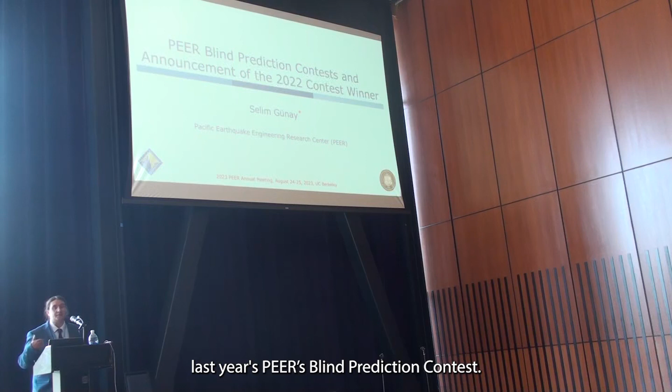My name is Selim. I'm a researcher at PEER, and I'm mainly here to announce the 2022, last year's PEER blind prediction contest. But before that, I wanted to show a few slides about what a blind prediction contest is, and mainly the PEER blind prediction contest.

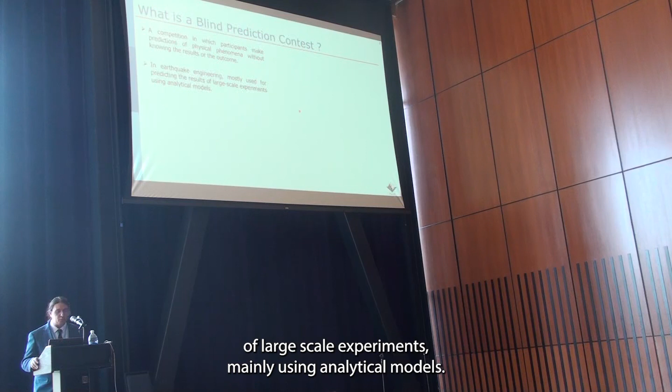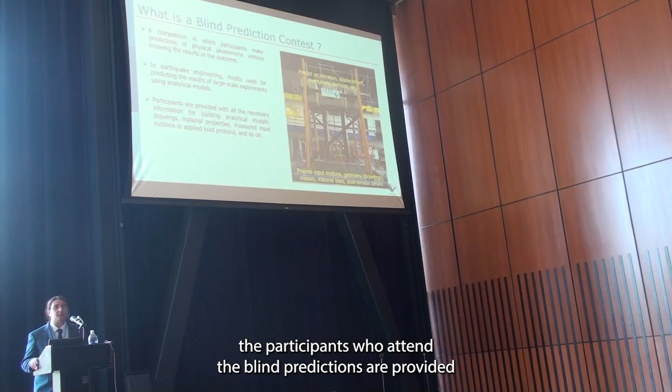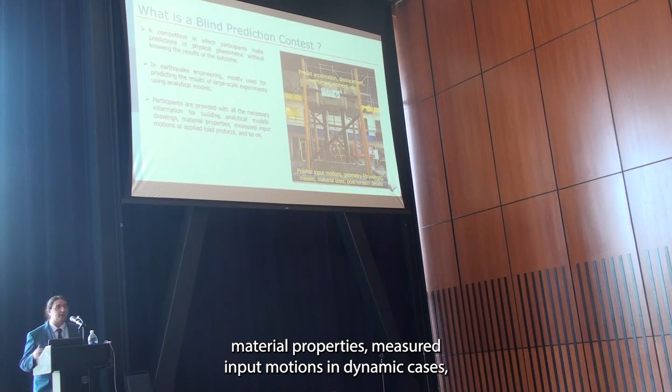To start with the definition: a blind prediction contest is a competition in which participants make predictions of physical phenomena without knowing the results. In earthquake engineering, it is mostly used for predicting the results of large-scale experiments, mainly using analytical models. Participants are provided with all the necessary information to build analytical models, such as geometry, drawings, material properties, measured input motions in dynamic cases, or applied load protocol for quasi-static tests, and so on.

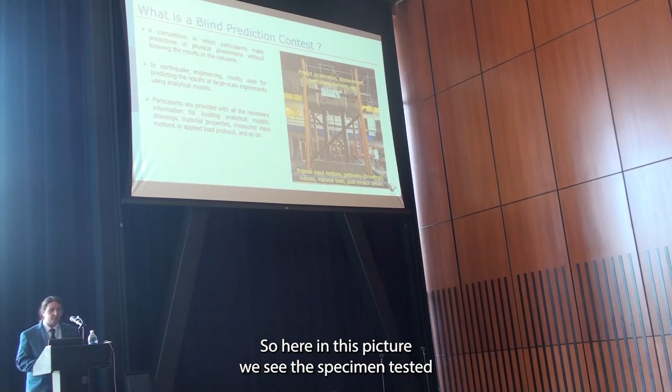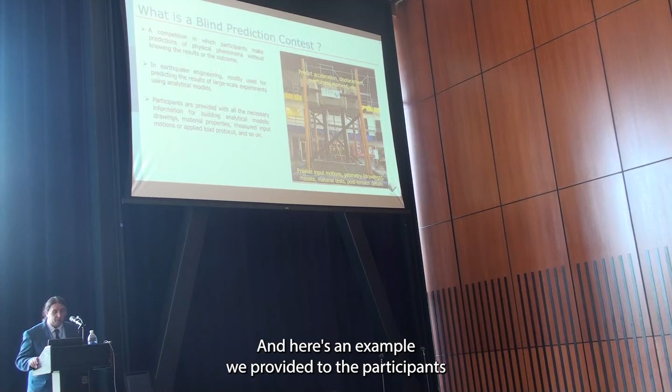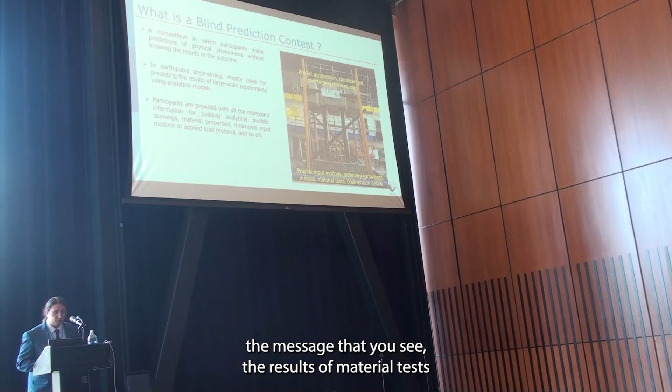Here in this picture we see the specimen tested and used for the 2017 blind prediction, which is basically a self-centering bridge bent. As an example, we provided the participants with the input motions, the geometry, the masses, the results of material tests, and the post-tension details, mainly for the self-centering system.

We basically asked them to predict some of the engineering demand parameters, including acceleration of the mass block, or the inertia force, displacement at the top of the column, overturning moment, and other quantities.

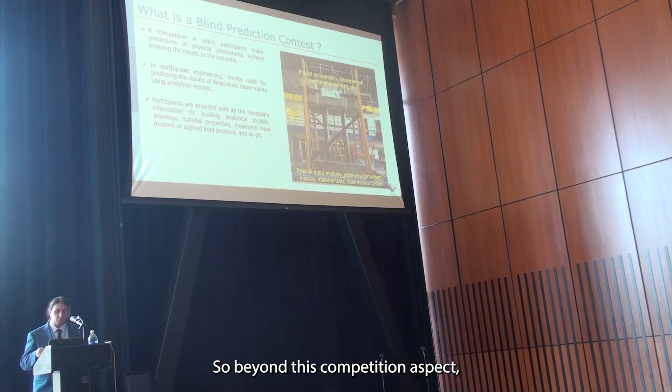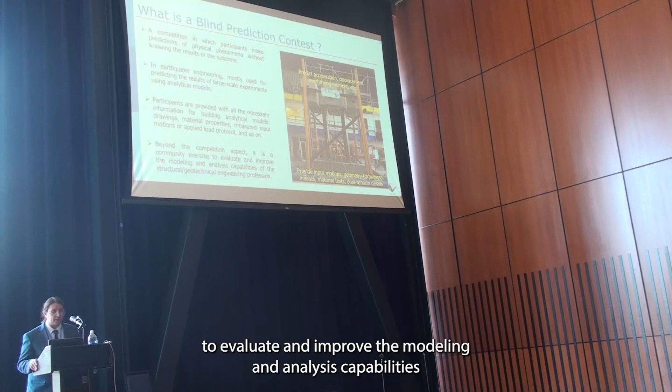Beyond this competition aspect, we can consider a blind prediction mainly a community exercise to evaluate and improve the modeling and analysis capabilities of the earthquake engineering profession, both structural and geotechnical. So it has that overarching aspect to it.

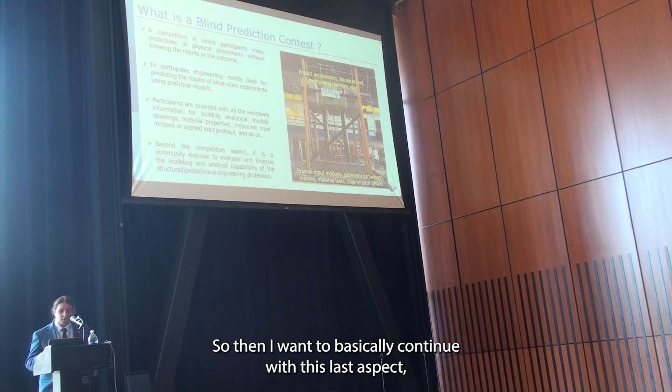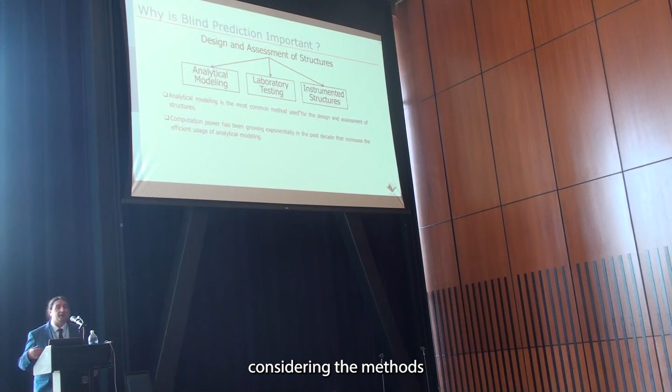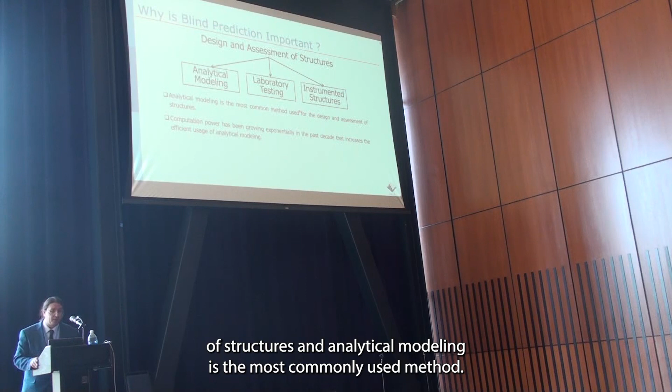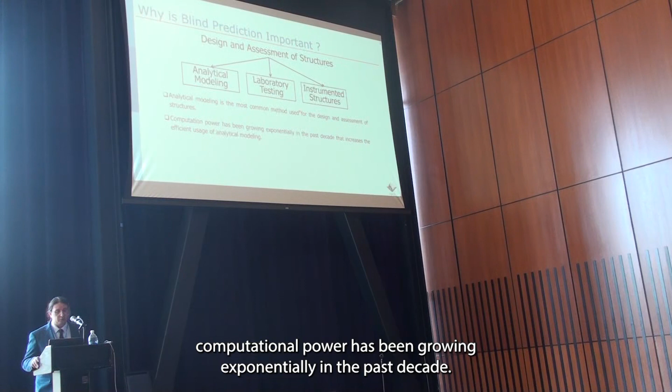So then I want to continue with asking why blind prediction is important. If we think about the methods used for design and assessment of structures—analytical modeling, laboratory testing, and instrumented structures—analytical modeling is the most commonly used method. And as we've seen in multiple presentations today, computation power has been growing exponentially in the past decade.

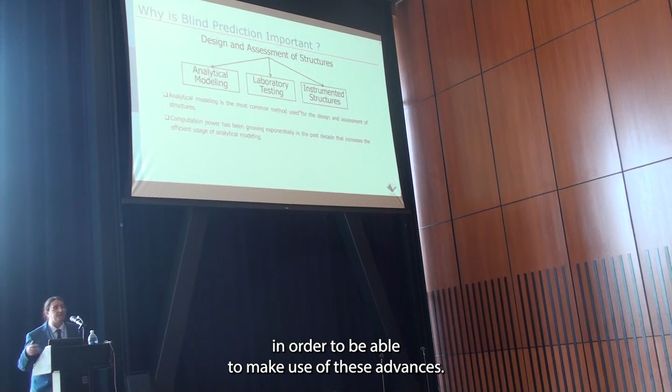That increases the efficient usage of analytical modeling. So what this means is, as a community, we need to have reliable analytical models to be able to make use of these advances. In that regard, blind predictions inform the current analytical modeling capabilities, identify the modeling areas that need improvement, and provide guidance on how we can improve those aspects.

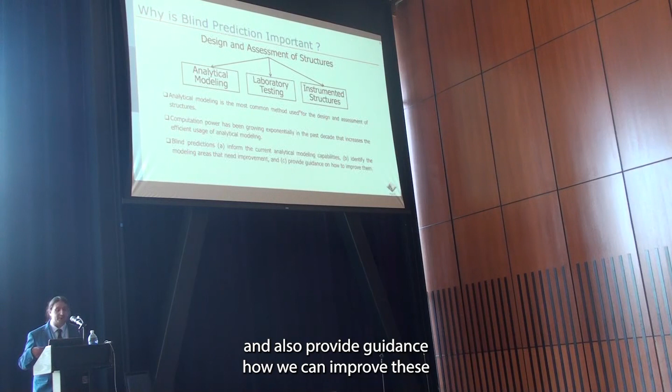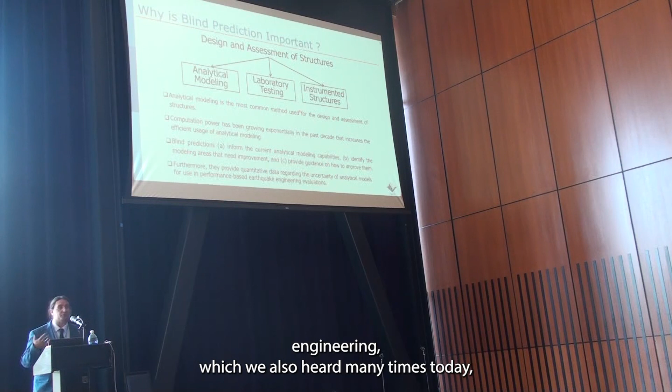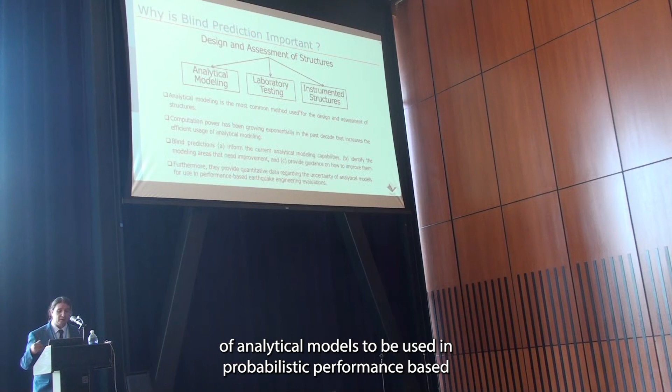Also in relation to performance-based earthquake engineering, which we also heard many times today, blind predictions are used to quantify the uncertainty, mainly the epistemic uncertainty of analytical models, to be used in probabilistic performance-based earthquake engineering, such as the PEER PBEE methodology.

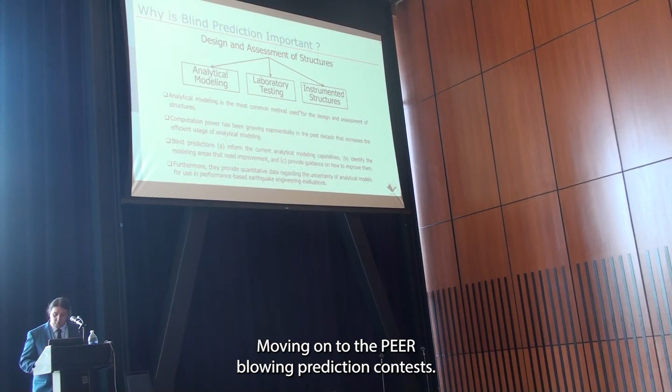Moving on to the PEER blind prediction contests. PEER actually has a long and well-established history of organizing blind prediction contests. It started in 2010, as Professor Mosalam mentioned in the morning talk, with a test initiated by Professor Mahin: the full-scale bridge column tested at the UCSD shake table.

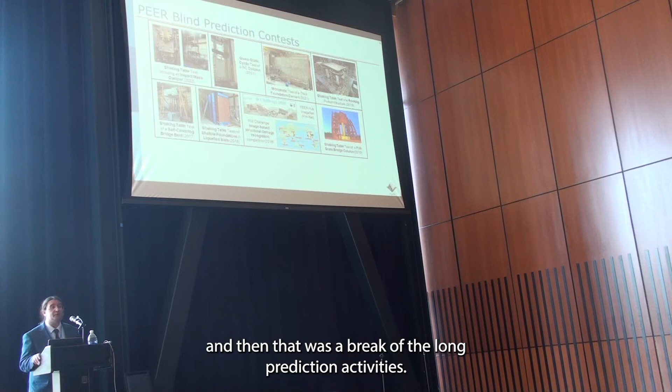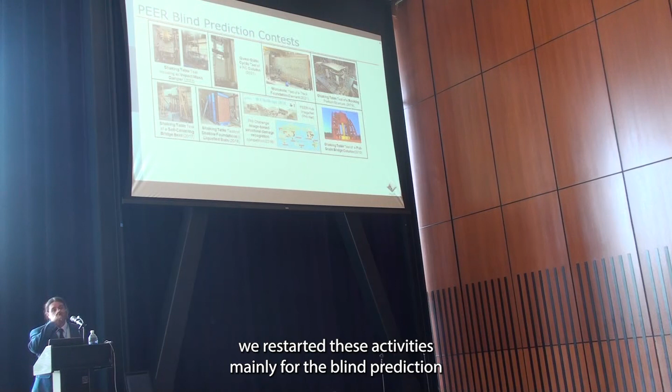Then there was a break in the blind prediction activities. In 2017, we restarted these activities, mainly for the blind prediction from the shaking table test of a self-centering bridge bent. After that year, we have been organizing blind prediction contests every year, one or two times.

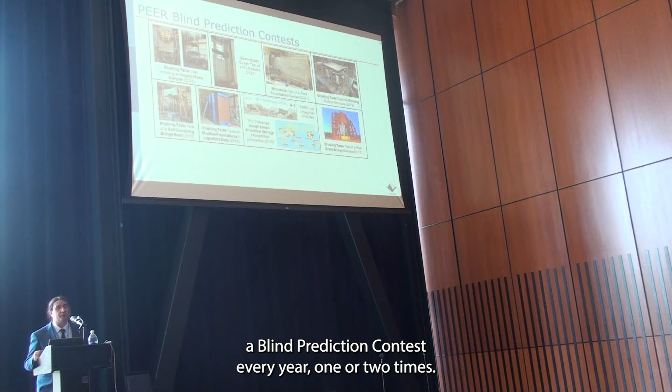You see summaries of these blind predictions in these boxes here, but they cover a variety of characteristics. These blind predictions include a variety of test types, including dynamic shaking table tests, quasi-static cyclic tests, or monotonic tests.

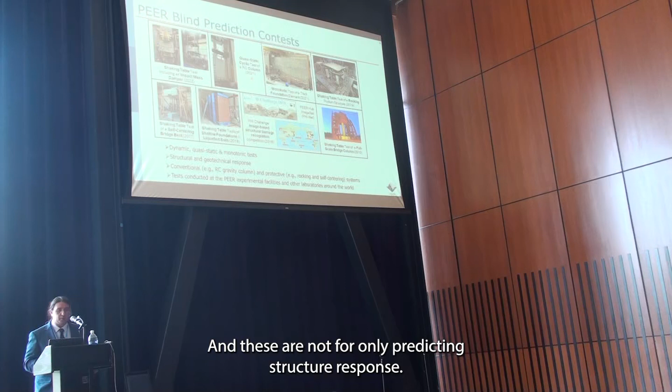And these are not only for predicting structure response. They include blind predictions for predicting both structural and geotechnical response.

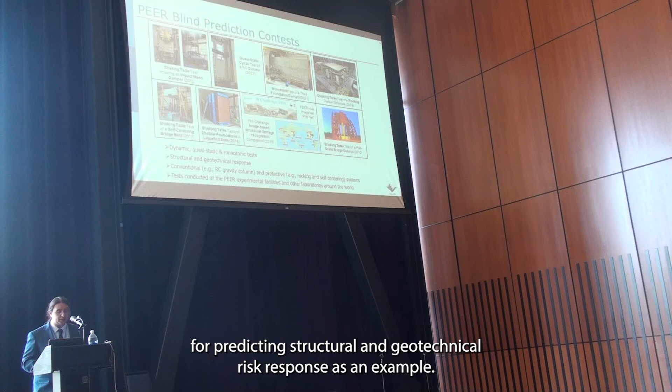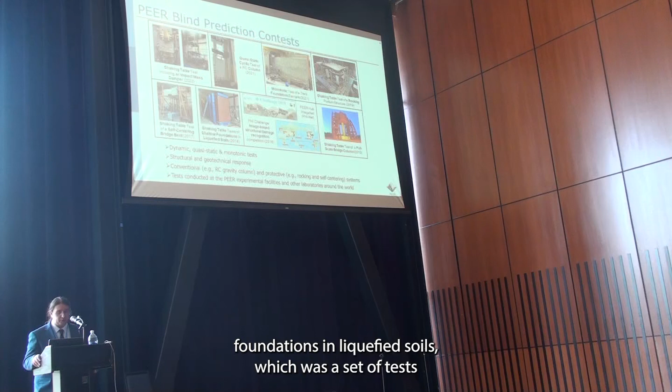As an example, we had a blind prediction that focused on shallow foundations, the settlement of shallow foundations in liquefied soils, which was a set of tests conducted at UNR by Rami Motamed and the team over there.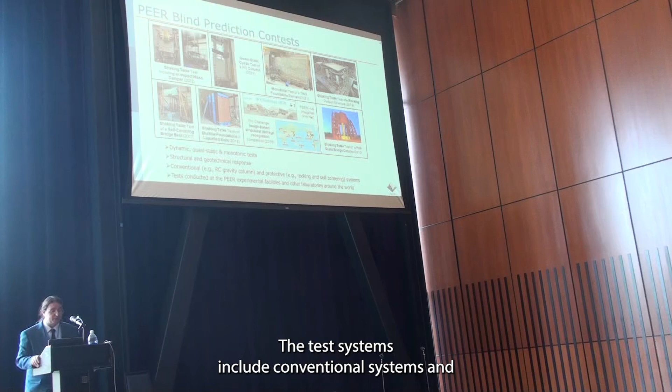As a third aspect, the tested systems include conventional systems and protective systems that we also heard about today. As an example of a conventional system, in 2021 there was a test of a reinforced concrete non-ductile gravity column which had shear defects.

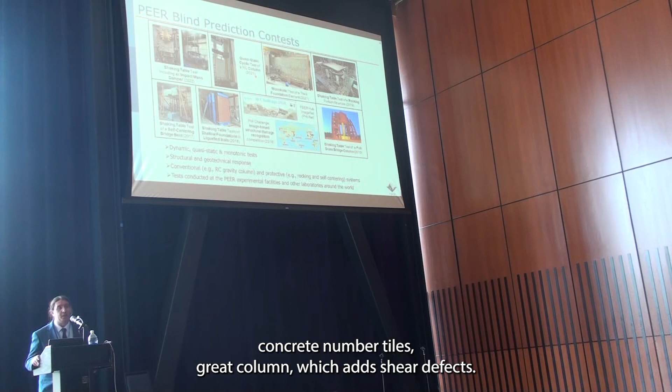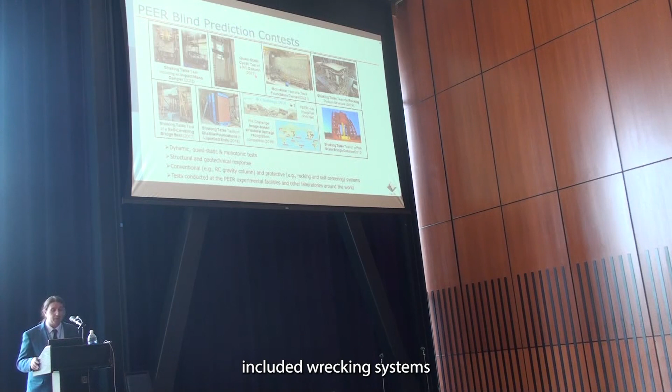We also heard about rocking systems from David Marr here, and some of these tests included rocking systems as well as self-centering systems, which are mainly protective systems.

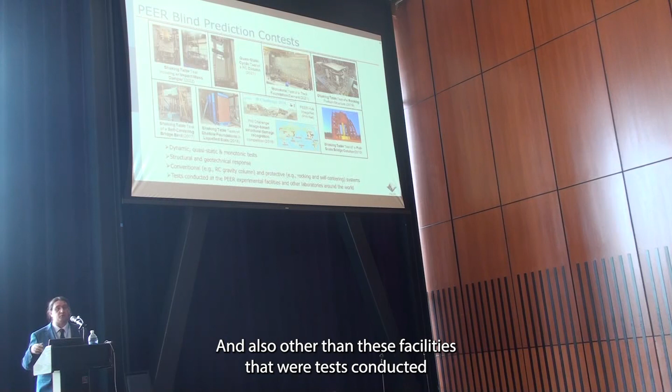In terms of the PEER community, these tests also provide some unifying aspects, as they were conducted in different PEER experimental facilities, including UC Berkeley, UC San Diego, and UNR (University of Nevada, Reno). Other tests were conducted in laboratories around the world, such as this one at the University of Bristol.

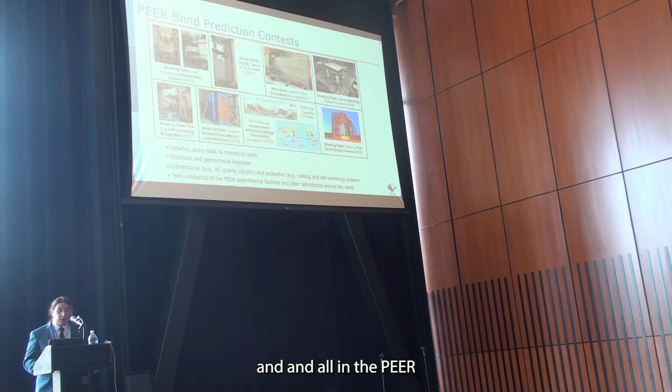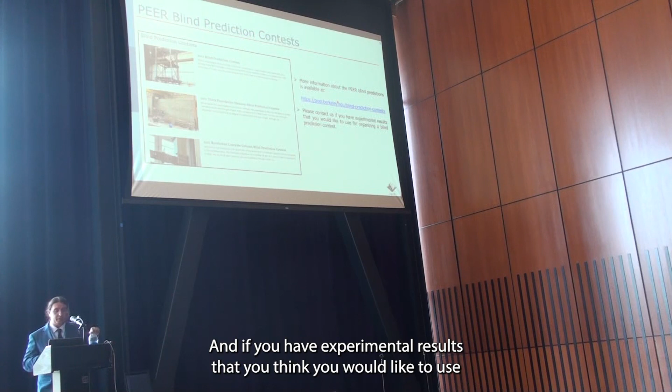On the PEER website, there's a dedicated page about the PEER blind predictions. If you'd like more information, you can check out that website. And if you have experimental results you'd like to use for organizing a blind prediction contest, please feel free to contact us—we'd be happy to work with you.

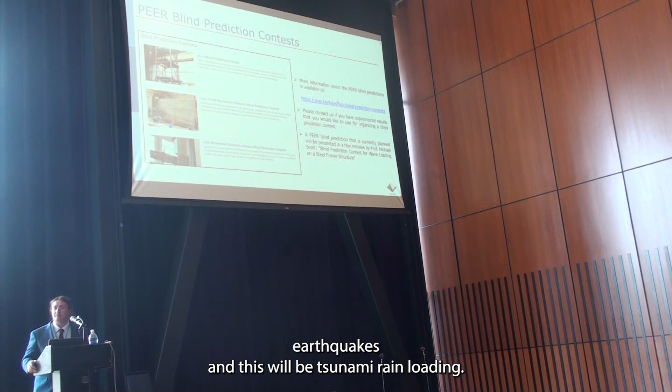As an example, a PEER blind prediction currently planned will be presented, hopefully in a few minutes, by Professor Michael Scott. This one will focus mainly on wave loading, different from earlier predictions which focused on earthquakes—this will be tsunami wave loading, so we're looking forward to that. We're also encouraging PSC students and other graduate students to participate in this blind prediction. You'll hear more about it from him.

As I mentioned, we've organized several blind predictions over the years and learned useful information from them. I'll briefly mention some of these here.

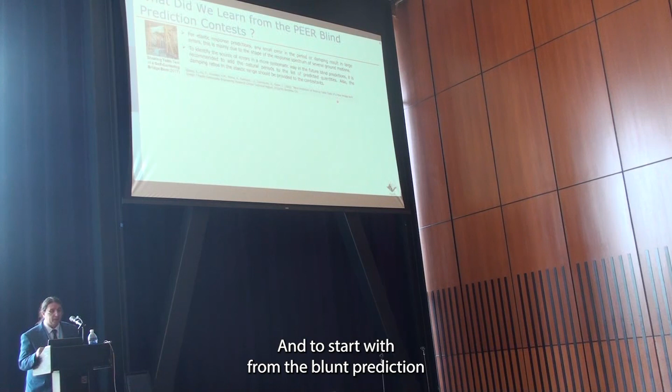To start with, from the blind prediction in 2007, we observed that for elastic response predictions, any small error participants have in period or damping values could result in large errors—mainly due to the shape of the response spectra of several ground motions.

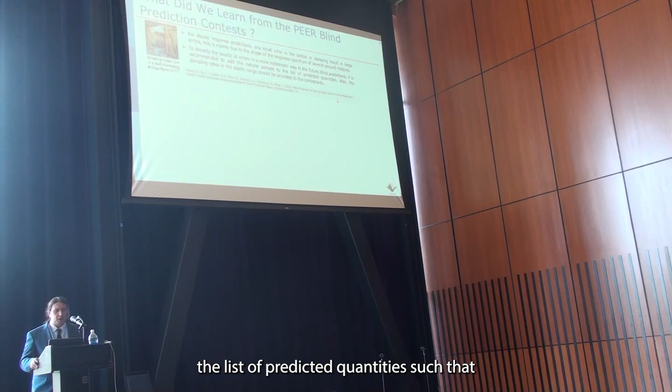Considering this, there was a recommendation to add natural periods to the list of predicted quantities, so the source of errors can be identified more systematically in future blind predictions. There was also a recommendation to provide the damping ratio to contestants. I'll get back to this two slides later, in my closing slide.

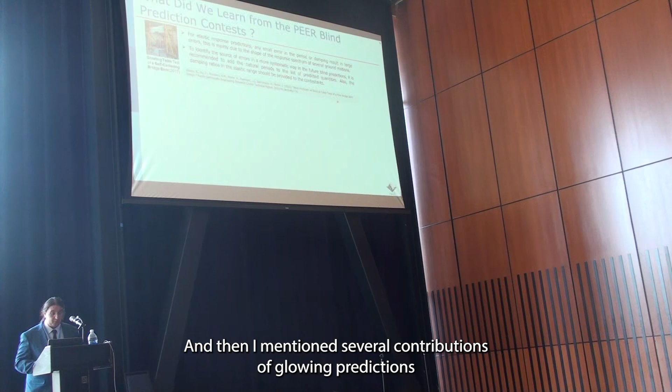I also mentioned several contributions of blind predictions in terms of improving analytical modeling—this can be considered a blind prediction that informed current analytical modeling capabilities.

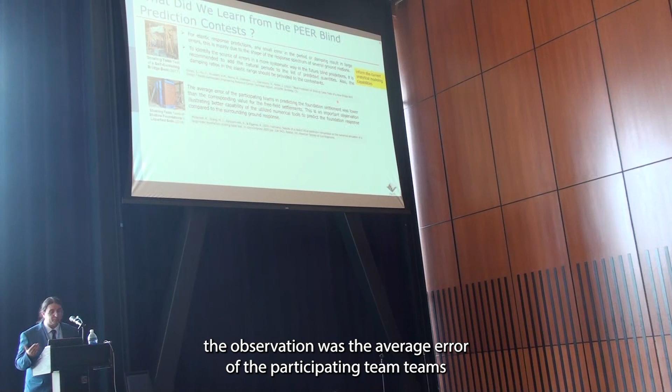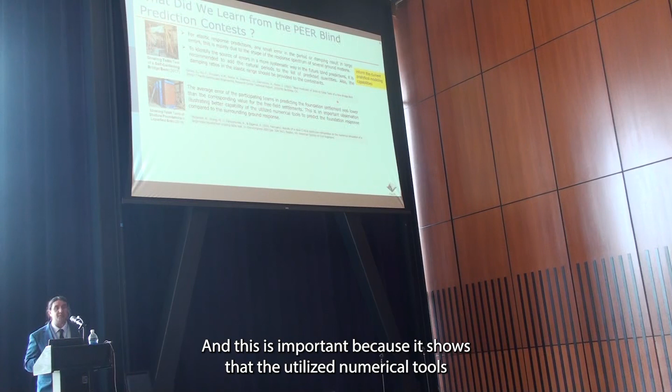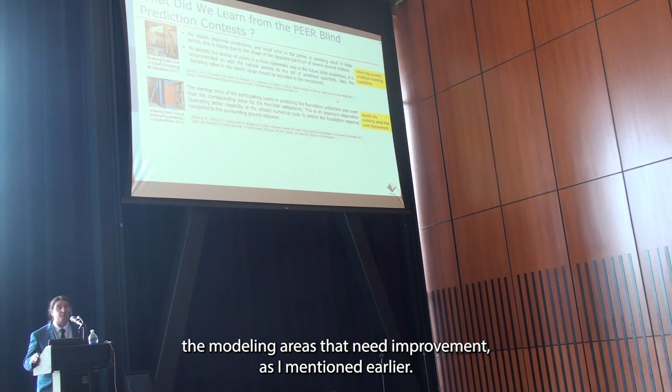For the blind prediction in 2018, there was a good finding about settlement: the average error of participating teams in predicting foundation settlement was lower than the corresponding value for free field settlement. This is important because it shows that the numerical tools used can predict foundation response better than surrounding ground response. This is an example of a blind prediction that identifies modeling areas needing improvement.

The last one I'd like to mention is from 2019, which is basically an observation about modeling guidelines and damping—a sensitive topic as always.

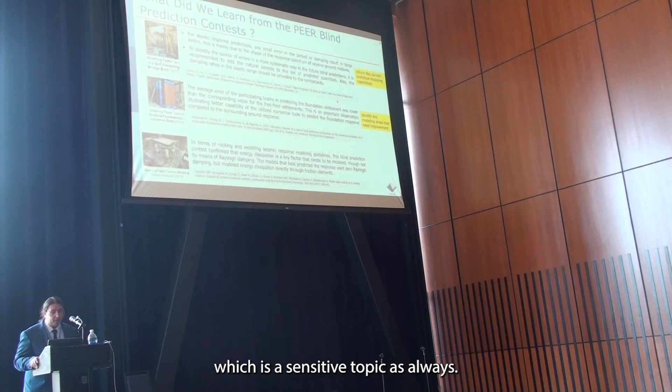In terms of rocking and wobbling seismic response modeling guidelines, this particular blind prediction contest confirmed that energy dissipation is a key factor that needs to be modeled, but not necessarily through Rayleigh damping.

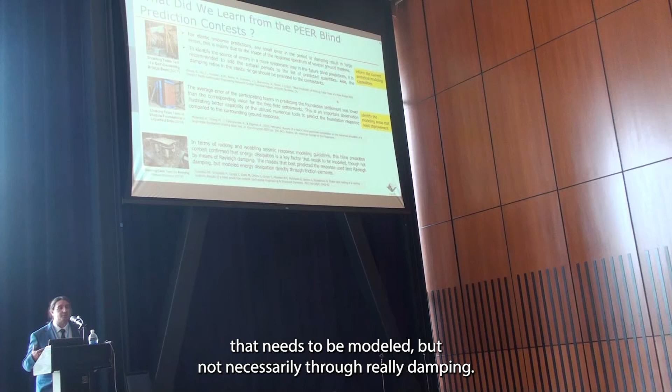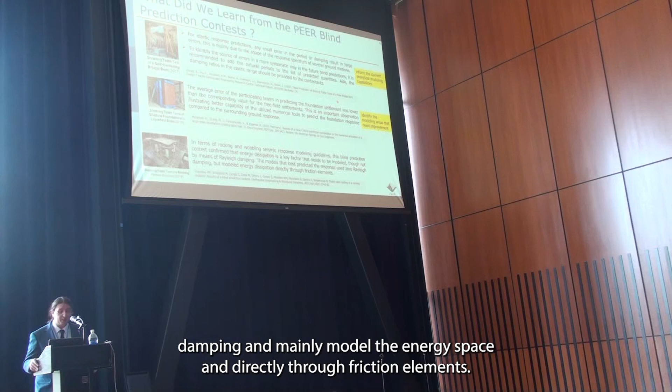The winning prediction basically predicted the results using zero Rayleigh damping, modeling the energy dissipation directly through friction elements. This can be considered an example of a blind prediction that provided guidance on improvement of current analytical methods.

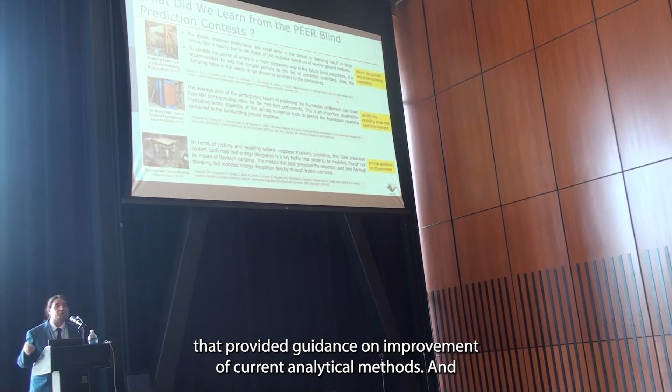These are my last two slides to wrap up, and then I'll announce the winner, which will be the exciting part, hopefully.

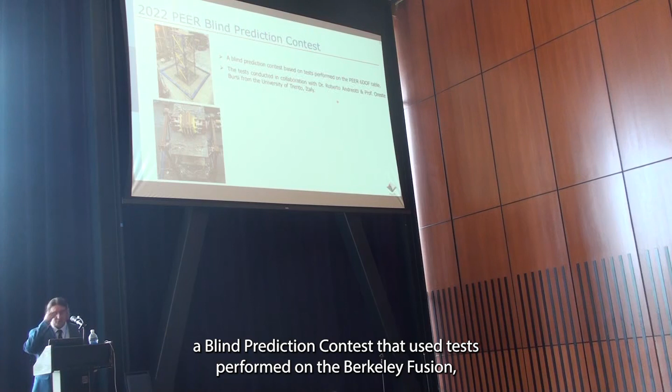Talking about the 2022 PEER blind prediction contest from last year—this was a blind prediction contest that used tests performed on the Berkeley PEER 6 degree of freedom shake table at Richmond Field Station.

These tests were conducted in collaboration with Dr. Roberto Andreotti, who was at that time a visiting student at Berkeley, and Professor Bursi from the University of Trento, Italy.

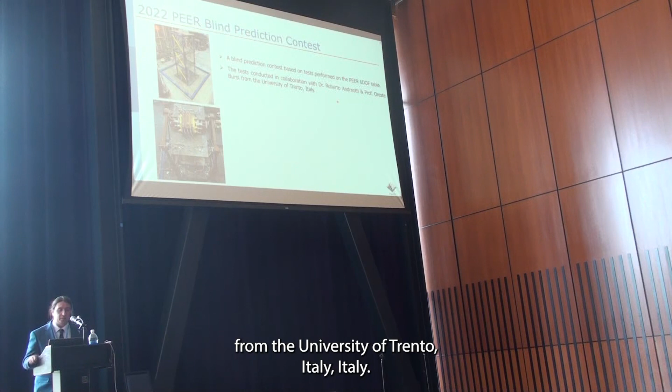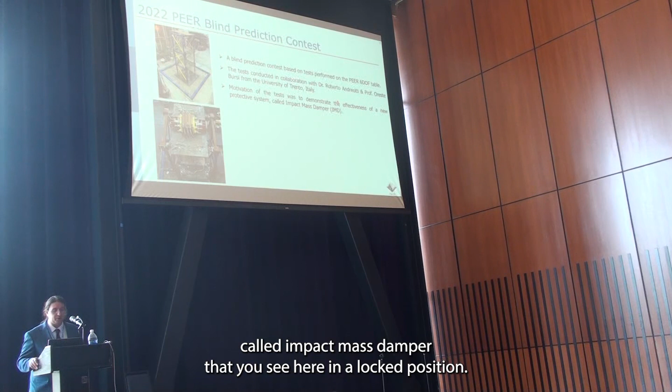The main motivation of these tests was to demonstrate the effectiveness of a new protective system called the impact mass damper, that you see here in a lock position. The idea here is quite similar to a tuned mass damper. When the structure moves to the right, the slider, being free to move, moves to the left.

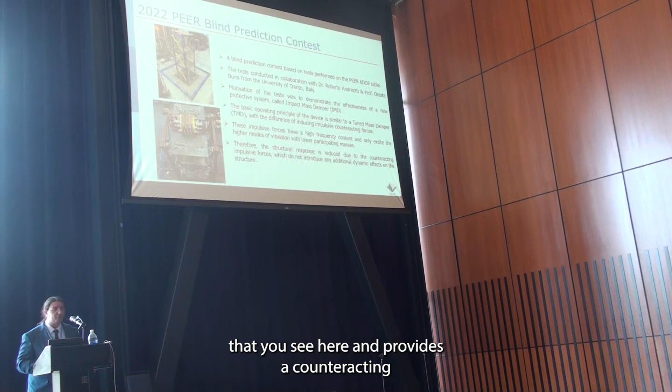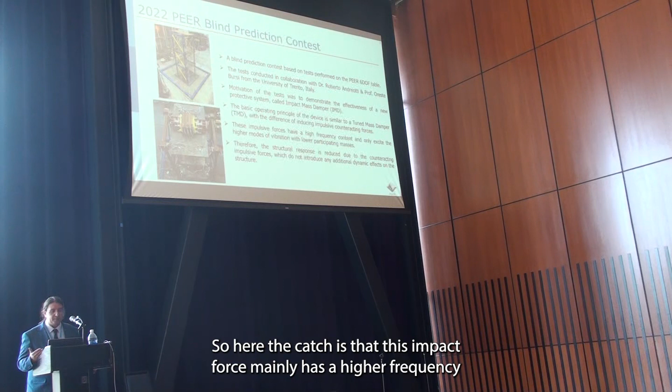And then it hits the pads of the stopper, providing a counteracting impact force. One may ask, isn't there an issue with this impact force? The catch is that this impact force mainly has a higher frequency content and only excites the higher modes of vibration, which have lower participating masses. So in terms of dynamic response, it's not considered a major issue. The structural response is reduced due to this counteracting impact force, which doesn't introduce additional dynamic effects on the structure.

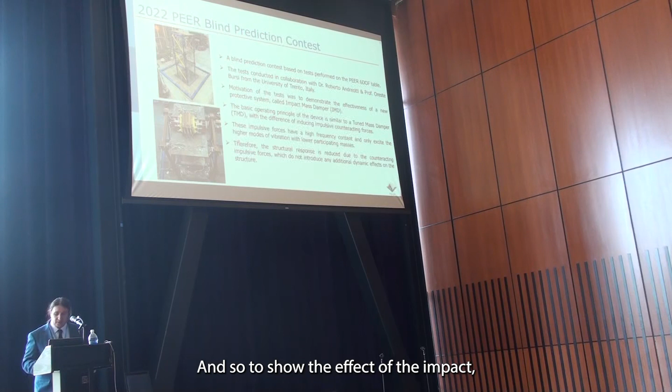This idea is reasonable and makes sense, but the final validation would be through testing, and that was the main reason to conduct these tests. To show the effect of the impact mass damper, the tests were conducted in two phases: one with a 3-story steel moment resisting frame without the IMD, and another set with the IMD. According to the test results, better performance of the system with IMD was shown.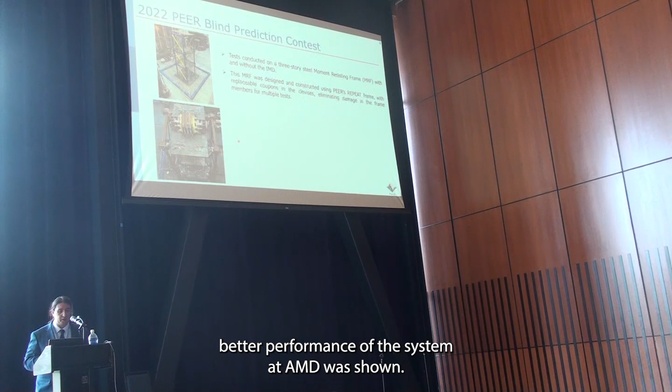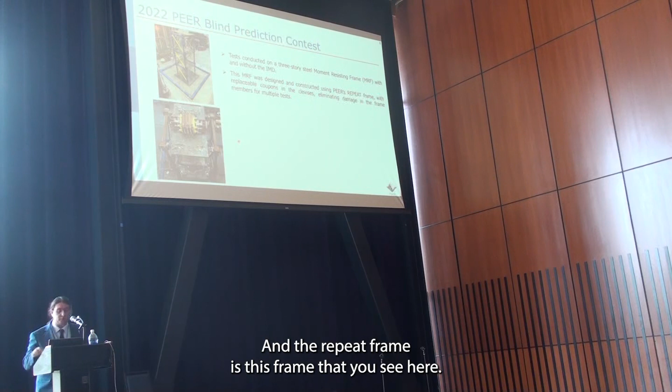I'd also like to point out that this moment resisting frame was designed and constructed using PEER's REPEAT frame, which you see here. The repeat frame has members connected to the clevises using steel coupons, which are chosen considering capacity design such that the ultimate couple moment developed by these coupons is less than the yield moment of the steel shapes, HSS sections or others.

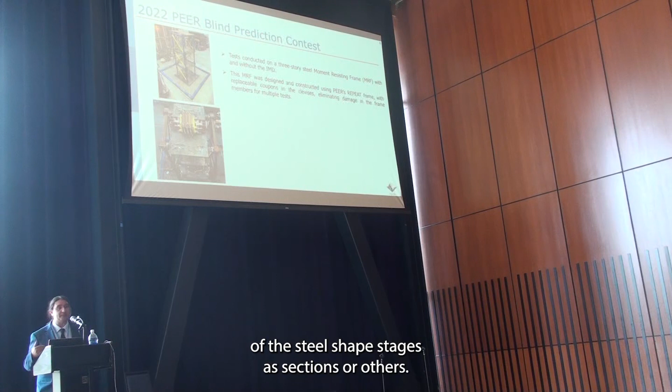In this way, there is never damage to the members, only to the replaceable coupons, so this frame can be used repeatedly. That's where the repeat frame comes in, and it's quite a useful tool. We have been using it for multiple tests.

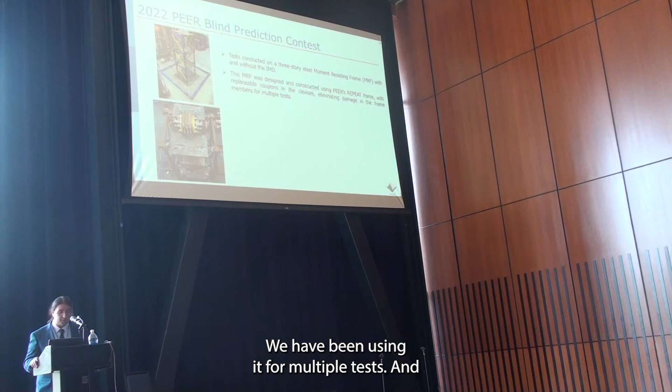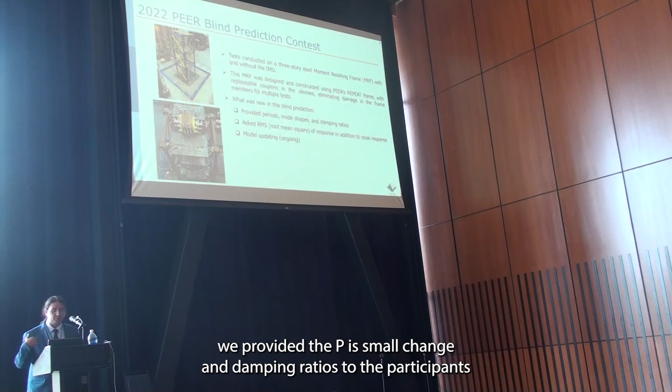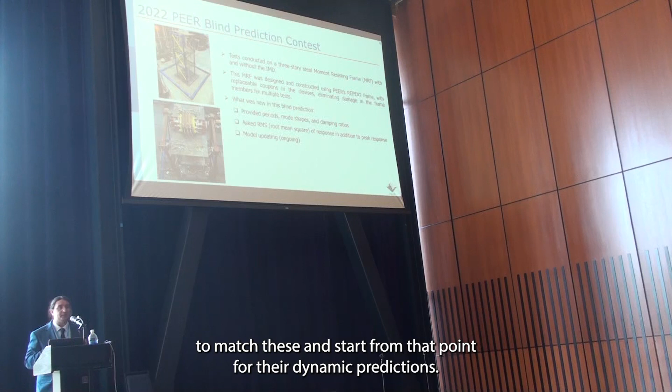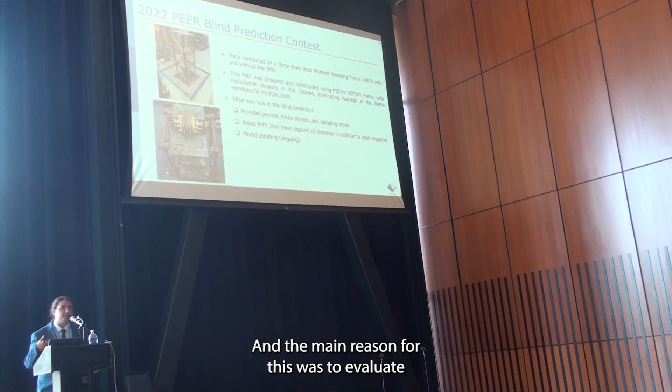So what was new in this blind prediction? Following the recommendation from 2017 and moving one more step, we provided the periods, mode shapes and damping ratios to the participants so they could tune their models to match these and start from that point for their dynamic predictions. As a second point, we asked for the root mean square of response in addition to peak response, mainly to evaluate the predictions for the entire time series and not just the peak.

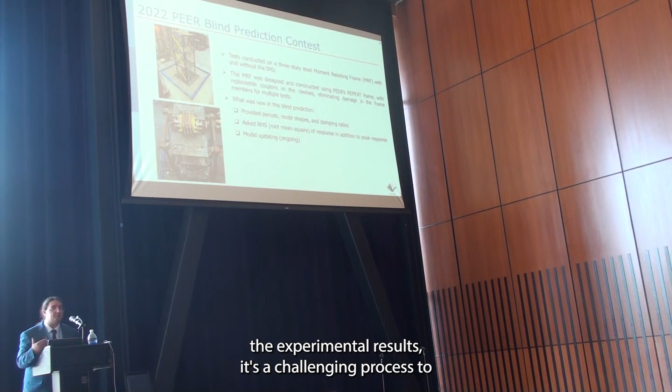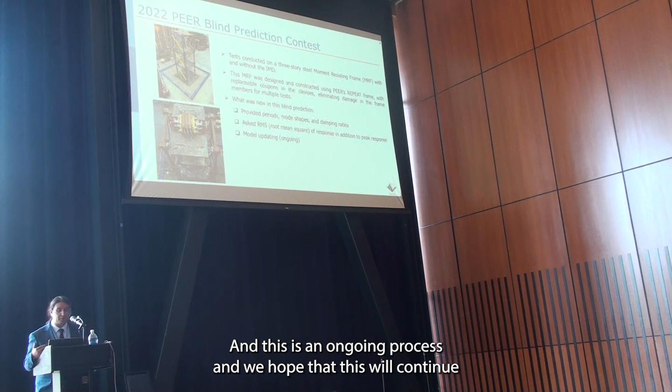And the third item, which is ongoing, is model updating. As I mentioned, the main essence of blind predictions is to predict the response without knowing the results. But most of us also know that even when you know the experimental results, it's a challenging process to reproduce them. So in this phase, we're asking participants what they would update or change once they know the results. This is an ongoing process, and we hope it will continue to contribute to the improvement of analytical modeling through the use of blind predictions.

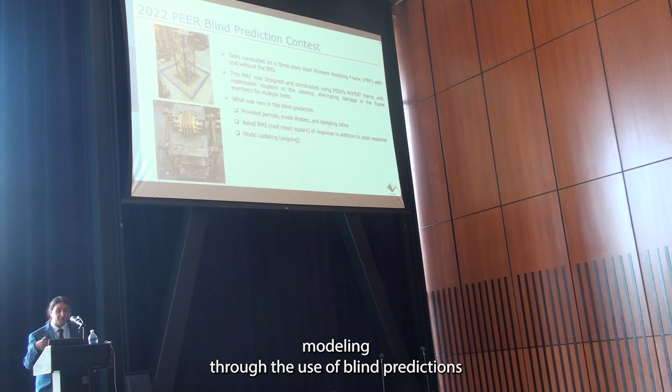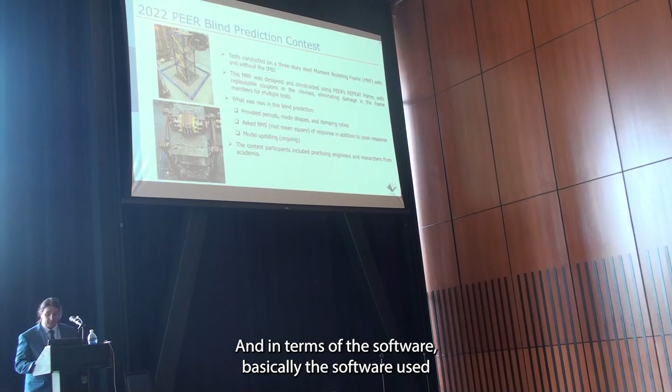Quick information about the contest participants: they included practicing engineers and researchers, similar to the participants of this meeting. In terms of software, the tools used included OpenSees, Strand7, and PISA3D.

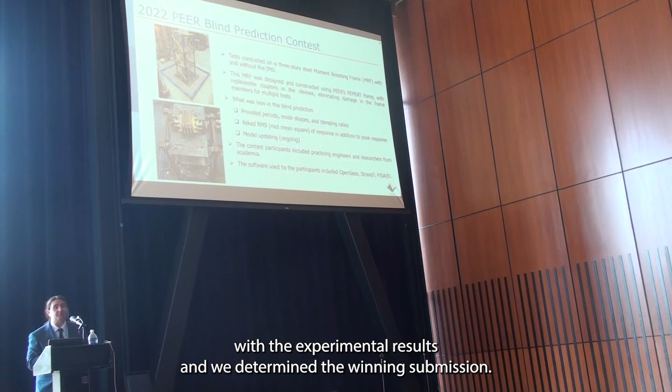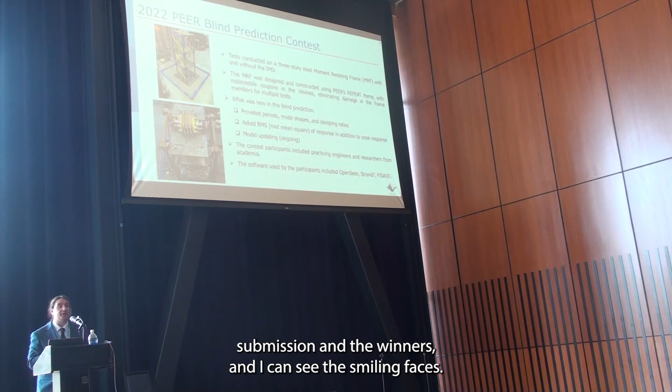After obtaining the submissions, we compared them with the experimental results and determined the winning submission. Now I would like to announce the winning submission and the winners. I can see the smiling faces - maybe my presentation wasn't as interesting. So, yeah, now I will announce the winner.

The winner is a two-member practicing engineer team from CoreBrace, including Chao Xian Li and Brent Saxey. Please join me in congratulating them for their winning submission. I would like to invite both of them to the stage to receive their plaques and get pictures taken.